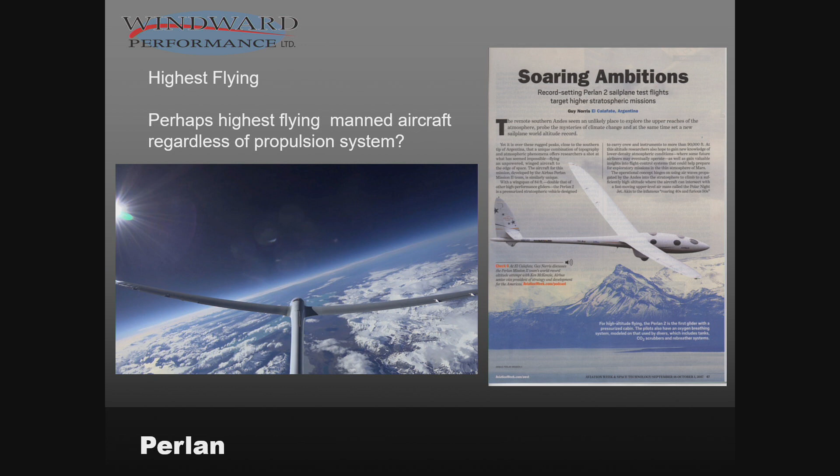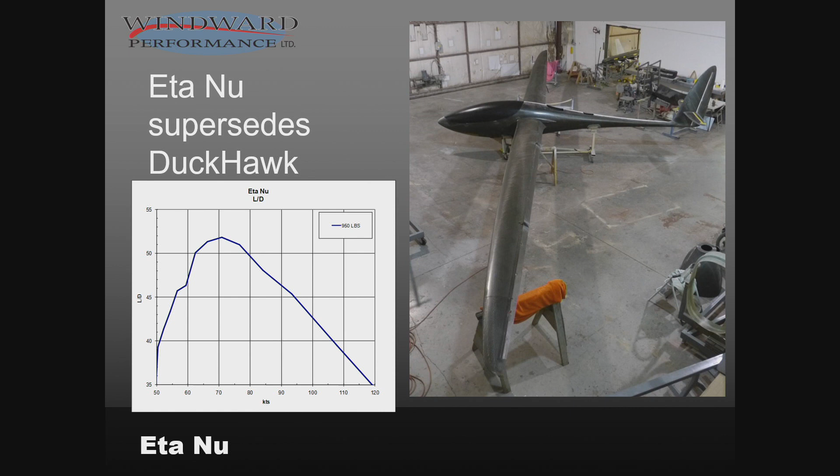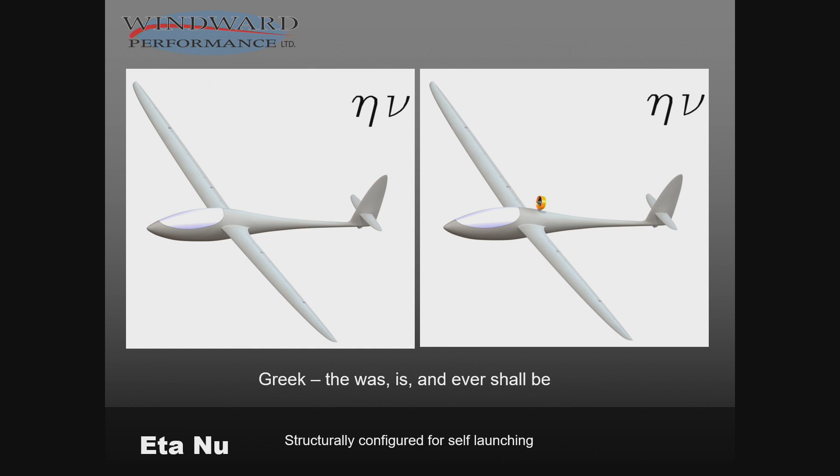That aircraft has been superseded by this one, which I call the Eta Nu. It's a bit of a different airplane in the sense that the incorporation of self-launching is a difficult thing, and it has to be built into the plane from the beginning. So here it's shown with a ducted fan, potentially an electric ducted fan. That's not something you can buy, unfortunately, and it's only about half done. But that's how it is. The name is from the Greek, right? The was, is, and ever shall be. So I think that's interesting.

But what would we do if we have the highest flying plane, the sweetest plane, and the fastest, most maneuverable plane? This previous sailplane is capable of 225 knots at 24,000 feet. So it's really, really fast compared to other sailplanes, gruesomely fast. And it can do that, and has done those things that I talked about.

That's exciting, but what would you do after that? Where would you go? What would be even more satisfying? What would be more rewarding? What would be more fun? And so this is this next plane, I believe, and I think that's wonderful. One of the things I've said about it is, how can I fly without leaving a wake? Just with beautiful elegance, with flexibility, with rewarding characteristics, with all these things. So there are some pieces to that.

And one of the special ones is, two seats side by side. And then the bottom one is, of course, we have to have that performance. Performance expands your experience. Performance is fun. So it comes with a cost, I do understand, it comes with some things. But we have to balance that out, that's what designers do.

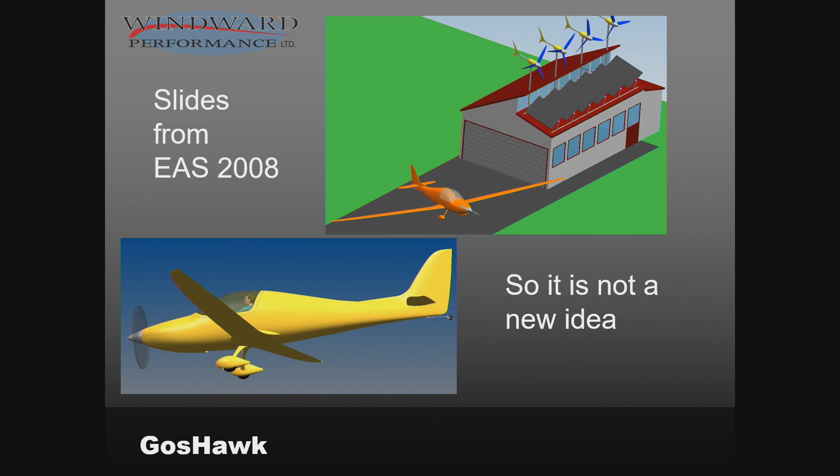So these are some slides. This was the plane that I was thinking about, and I had even a loft at that point. An electric airplane, I thought, really had some neat tangibles and intangibles, right? So I've been thinking about this for a long time. I've been building this plane for a long time. I wish it was done, but I promise you I wish it was done more than all of you, but hopefully some of you wish it's done too. But it isn't, but it's coming quite far along.

And when you make a special plane, what happens is you end up with a lot of very bespoke things. So it might look conventional, but it's all very special. That's the real plane, a molded, pre-preg carbon fiber plane. The mold's been made. The propeller's special - we won't talk specifically about it, but it's very integral to the whole plane and its performance. That's a special propeller, custom made, custom designed for this.

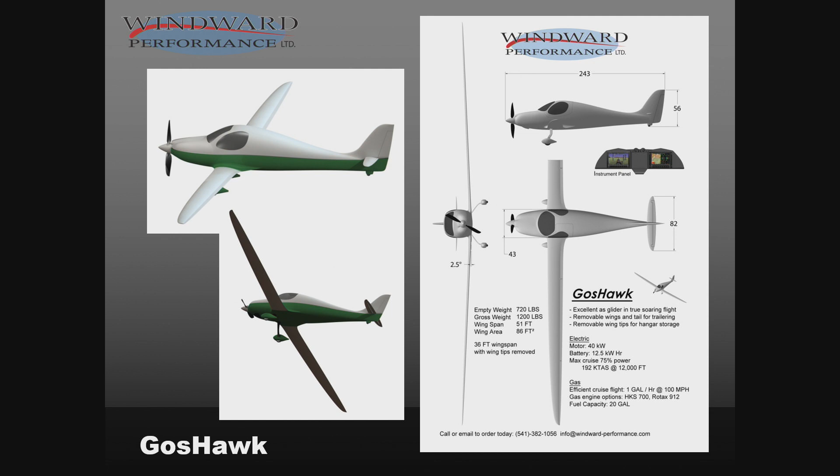And in general it looks like you see here. Long wings, I guess, for some people. For some, maybe not so long. But a plane that weighs about 1,200 pounds gross.

We're going to talk a lot about 900 pounds in this discussion, just because that's kind of a weight for a single person. And as an electric airplane, it suffers from some great deficiencies, right? It can't carry much energy along with it. So we have to be very efficient in everything that we do with it, meaning very clean, right? We can't have a lot of drag. The propulsion system has to be terribly efficient also, so this tractor configuration is a very good way to do that. It's integrated into the airplane.

Otherwise, the conventional airplane, I believe - you looked at the previous planes that go the highest and have the highest lift-to-drag ratio. I didn't say it, but an Eta Nu has about a 52-to-1 glide ratio, and that holds up very well throughout the speed range.

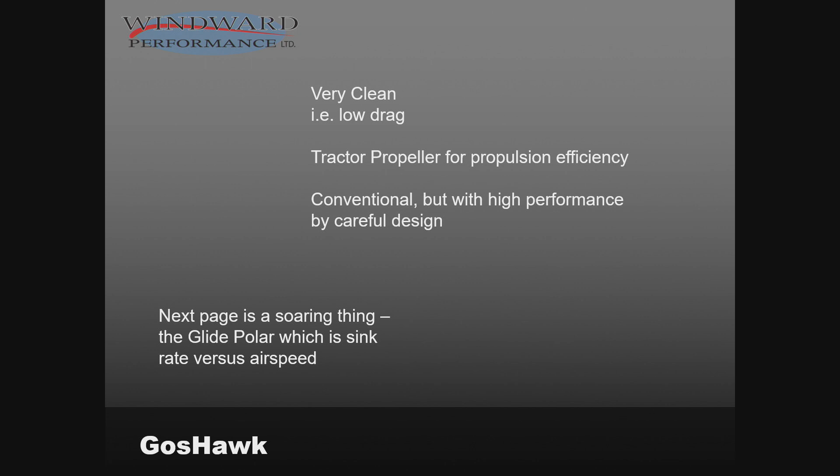So that number oftentimes talks about a peak number, which I consider almost irrelevant, but what does that performance look like? I know there's some soaring people here, and this is called a glide polar. It's really just a measure of sink rate, for straight line flight. Oftentimes we're circling, and in the analysis later we'll include circling - I may not specifically point that out later, that this is not necessarily directly representative of that. But it is the one that you see when you talk about gliders, and when they talk about glider performance, they'll talk about this polar.

But we can change this into a little bit different format, where we just sort of convert it into lift-to-drag ratio. So this is for the same vehicle. Those are representative - we have speed, and then we have this lift-to-drag ratio, which at high values of lift-to-drag ratio equates to sort of this glide angle, if we go back to some kind of soaring thing.

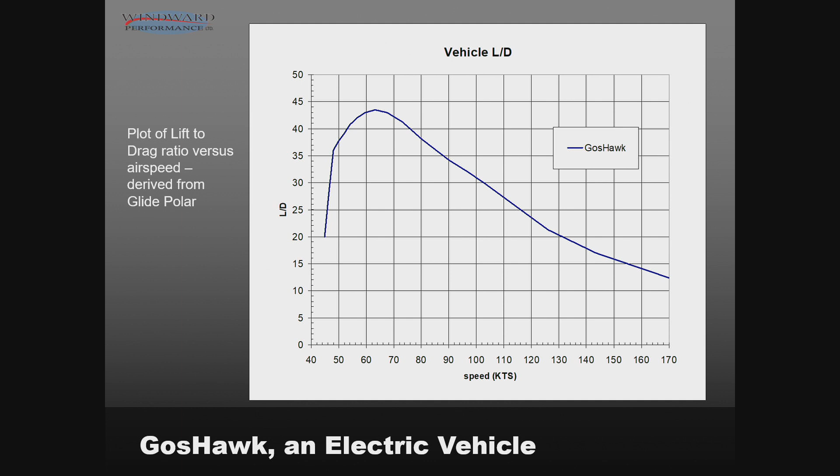So it's an electric airplane, and I would like to compare it with some other things, electric vehicles, and we'll just use some ground vehicles, right? And we want to characterize a couple of vehicles. I picked a couple of Teslas here, and we go back to this lift-to-drag ratio, and we can think about the lift-to-drag ratio for a wheeled vehicle, all right? And so I've eliminated the lift-to-drag ratio at zero velocity. It's an uninteresting point, actually, and there's some peculiarities that happen there.

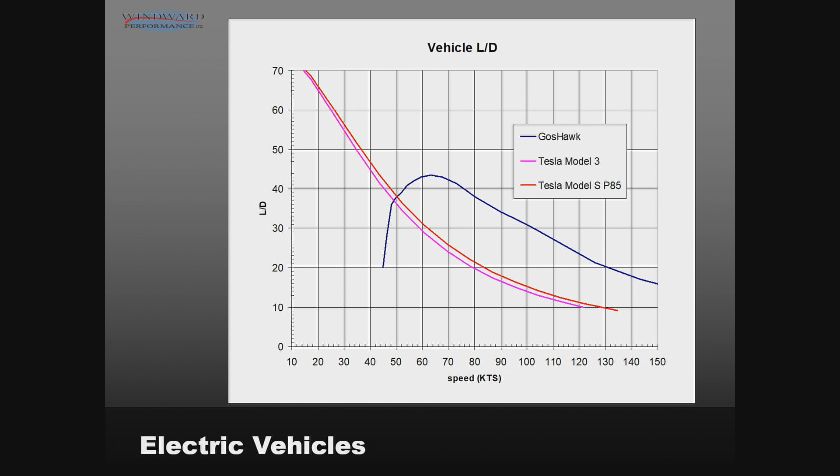I did show this slide to someone, and they asked, where did you get this? And I said, well, there's enough information about some of these cars. They've put them on dynos, they've done some other things, and so I can infer a lot of things, and I can peg down a couple of points. So I've put all the pieces in there, and it matches up quite well with the predicted performance of the car, like their top speed and some of these other elements, right?

That previous set of data, the lift-to-drag ratio, can then be converted into this other one, nautical miles per kilowatt hour, right? And forgive the units, but I just decided that we would use nautical miles, knots, nautical miles per hour, and then of course we have kilowatt hours. That's distance divided by energy. So just think about the units that way and you won't get too confused.

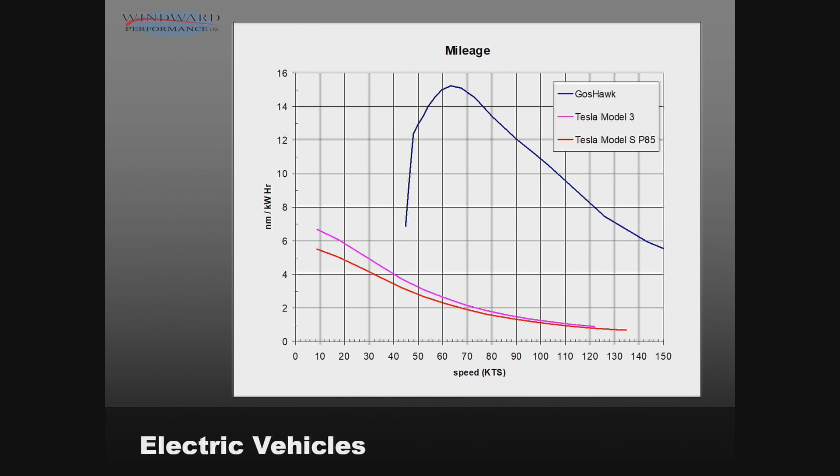But you can see that the Goshawk is very much more efficient. Now, they're completely different vehicles. The information for the Teslas is for single occupant, and the information for the Goshawk is for single occupant. So, you could put more occupants in it, and they're a little bit different. But just for fun, we'll put something really extreme in there and see how that compares with the Goshawk. Because the Goshawk obviously was much better at covering distance for a certain amount of energy than those two wheeled cars, right? Very nice cars, though.

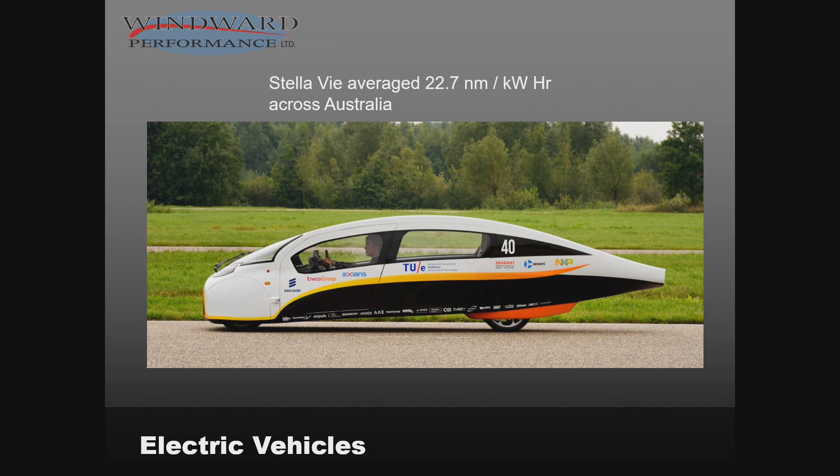This is a specialized vehicle. The previous presentation had the Sun Racer, right? The Sun Racer competed in that race across Australia, and now they have a different class called the Cruiser class, where they reward some points for extra amenities like extra seats. This is a 5-seat vehicle. It did race across Australia, and it averaged 22 nautical miles per kilowatt hour. It also did that with an average of 3.4 occupants. And so I have a curve for the vehicle with a single occupant that I've derived, and then we can see the big green dot over there.

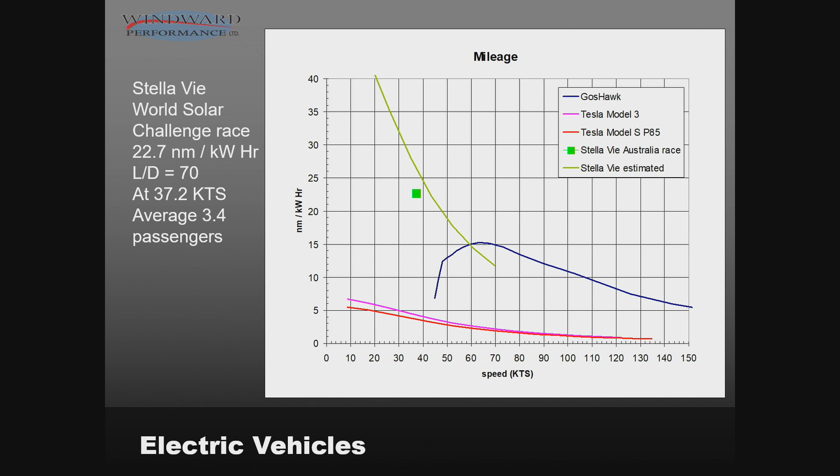So while that's very much better, it only does it at perhaps an uninteresting speed, right? It's not better than a Goshawk above 60 knots. So the plane is very efficient at these higher speeds. And this average speed of 37, maybe that's not even terribly interesting for you. Might be too slow. Let me just check, I'm reading the slide here. The lift-to-drag ratio at that low speed is quite high, but that's important if that's the speed you're going, right? If the competition eventually goes much faster, maybe they'll have to get those wheels off the ground.

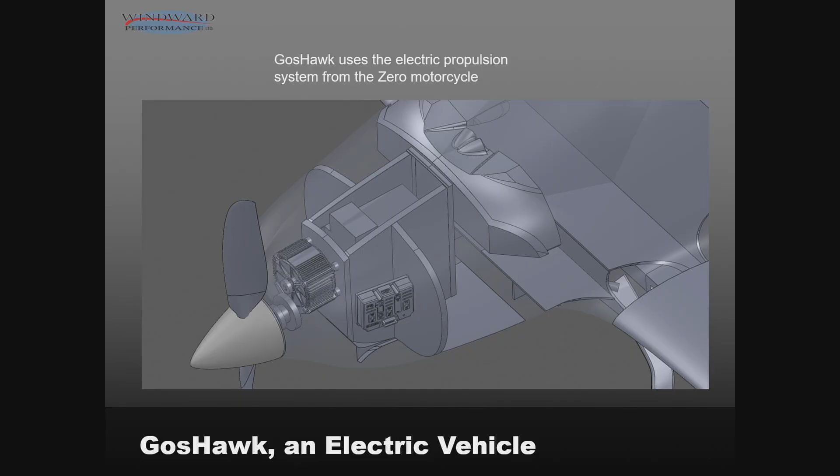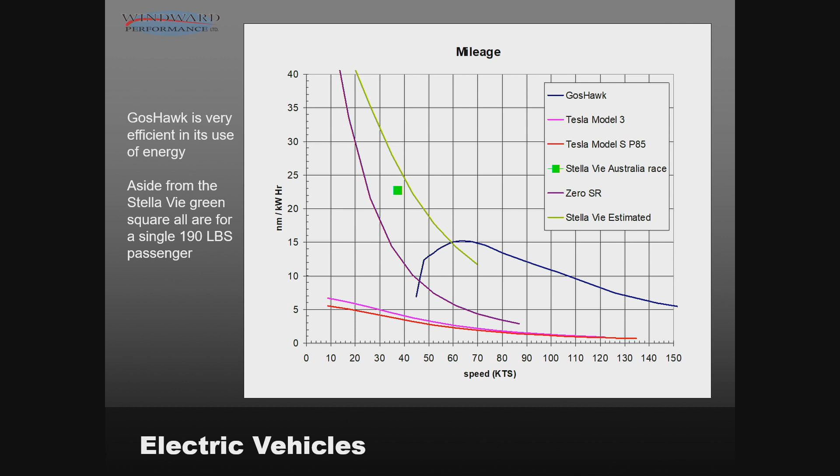The Goshawk utilizes all the components from the Zero motorcycle. So the battery is here, the motor's here, the controller's here. So I threw in this extra slide here. What if we put a Zero motorcycle, which is an electric motorcycle? That's that purple line. Okay? So not as good as the Stella Vie, very good, much better than the car. And I think one of the other slides earlier in the day had a motorcycle in there too, and I can't quite remember whose it was, but it was in there. All right.

Now, the reason I presented that is to say, here's a Goshawk. It's a very efficient vehicle. Maybe we can all even agree on that. And so it's an electric vehicle. It's as efficient as we can do, right? The whole design is built on this efficiency. If I was going to now show you some kind of performance curves for something else, like a business jet in this case, this is some plane.

You can see this graph. We're talking about taking off. We're talking about climbing over the airport. Then we start a climb in the direction of our destination, and we cruise, and we descend. So we have 1,152 nautical miles, burns 191 gallons. It cruises at 422 knots, and it takes 8.4 minutes and 14 gallons to climb to 28,000 feet.

Sorry, that one's misplaced, but that little arrow is supposed to point to that corner up there. The little gap in there I didn't graph, but that's the acceleration from the climb speed to the cruise speed and some other things. So a lot of stuff's built into this, and it's the same analysis that then I'm going to show for the Goshawk.

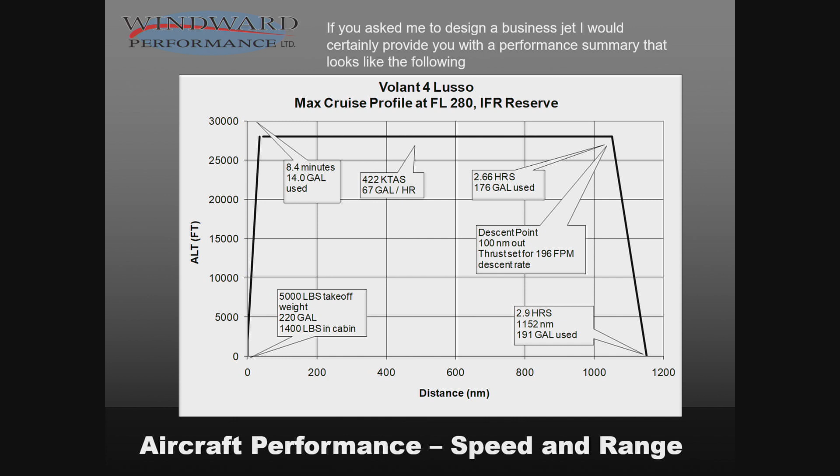Whoops. Sorry about that. I went to push the laser and got the next slide.

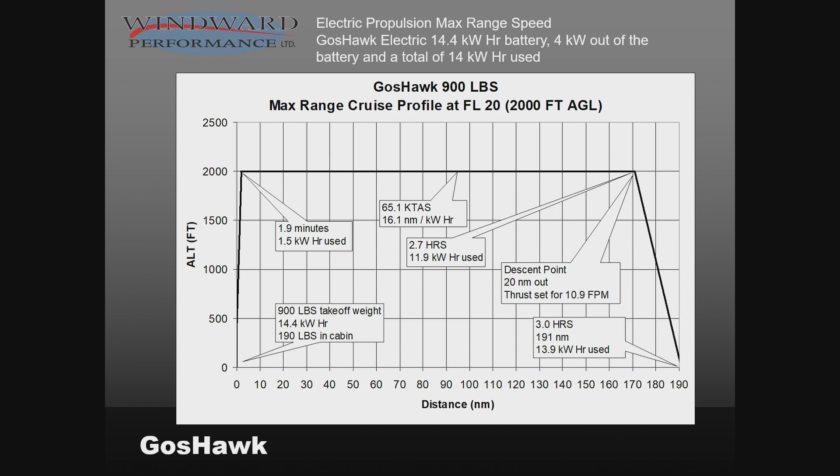So this is kind of a range profile for things. And maybe you're not excited about it, right? But it's still very good, I think, right? One of the really nice things about having a little battery is it doesn't turn out to be terribly expensive. All right, so the plane, though, is really efficient. And as a result, it also can turn out to be quite fast. This plane will go 172 knots. It's structurally capable of that.

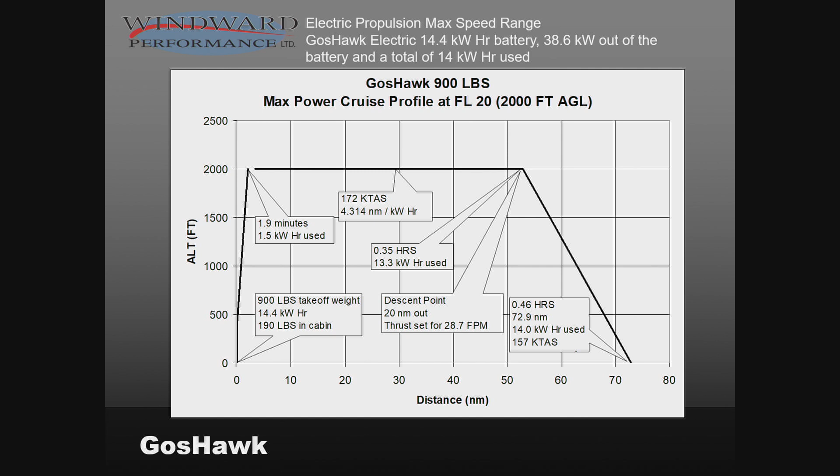You see the same climb. You see the very high-speed cruise. That consumes the battery very rapidly. The range goes down to just under 73 nautical miles using the same 14 kilowatt hours out of the 14.4 kilowatt hour pack. All right. Average speed, though, across that is 157 knots. That's kind of fun.

Soaring. So, soaring is something that's very exciting. Soaring is something that's rewarding. I enjoy it very much. And we're going to talk about incorporating that now into elements of this electric flight. Right. Ultimately, regenerative soaring will show up, and so we're going to take energy from the atmosphere. We're going to fly in the updrafts, and we're going to avoid the downdrafts. We're going to do those kinds of things.

And then just to point out one thing, conventional soaring only stores energy in the vehicle with potential energy, with altitude. All right. Hopefully, people have a little bit of understanding. We're going to talk about thermals and thermaling. That means you circle in the rising air, thereby bringing your vehicle to a new altitude that's higher, adding potential energy to the system. You then glide over to another column of rising air, and you repeat that process.

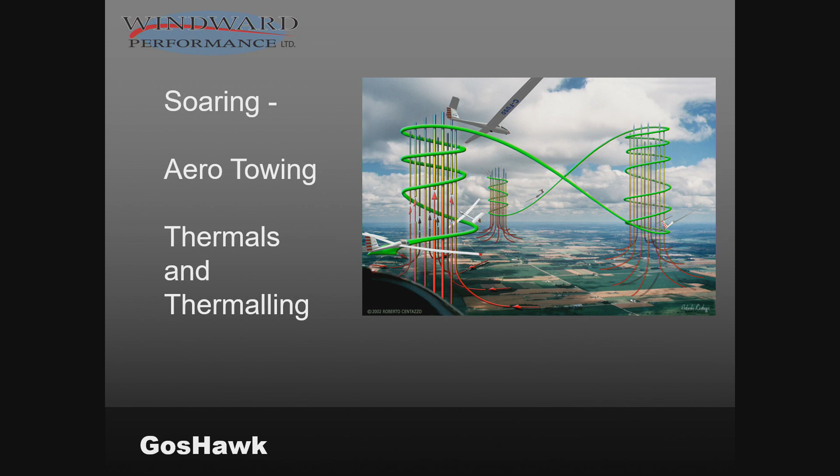And gliders can fly for many, many hundreds of miles, right? 1,000 kilometers is one of the big achievements that you do in soaring, and the planes there have done that. Well, not the high altitude one. But even the little SparrowHawk has gone 1,200 kilometers on a soaring flight. So 1,200 kilometers, right, which is quite a long distance.

How do you get these unpowered vehicles going? If you're not familiar with another soaring term, aero towing is what you do. You hook it up, and I hope everyone kind of says, this seems silly, but it's what happens. I put that one picture in there. Siemens put an electric motor in a plane, and they did tow a glider. They called it the first time that's ever happened. If they were here, I'd ask them how many kilowatt hours they used to do that tow. Do you know?

16. Wow. Well, that's because that plane in the front is really crappy. But here's a regular plane, all right? And we can convert the energy capacity in gasoline. There's conversions, there's efficiencies, there's other things that might happen.

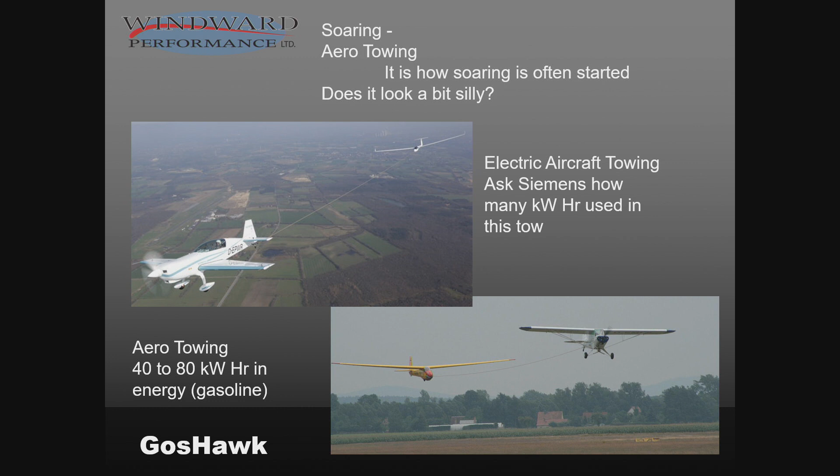But I estimate that about 40 to 80 kilowatt hours in gasoline is used to do a tow in a conventional tow plane. One kind of plane is not used across the board, but Cub-type planes are used. Pawnees are terribly draggy things. They're kind of a Cub with the wing on the bottom, but you can use Cessnas and other things to do this towing operation. So when we get back to soaring, we say it's completely free. It's not completely free because we make an investment in the beginning.

Okay, that's this tow. Another little graph, because we're going to talk more and more about soaring, and I think it's quite nice. One of the things we're going to talk about is that when you drive your Tesla, you can decelerate, you can recoup some of that energy. You pay a heavy tax on that because you don't get it all back. And none of the parts of this regenerative soaring that we're going to get into are terribly efficient either.

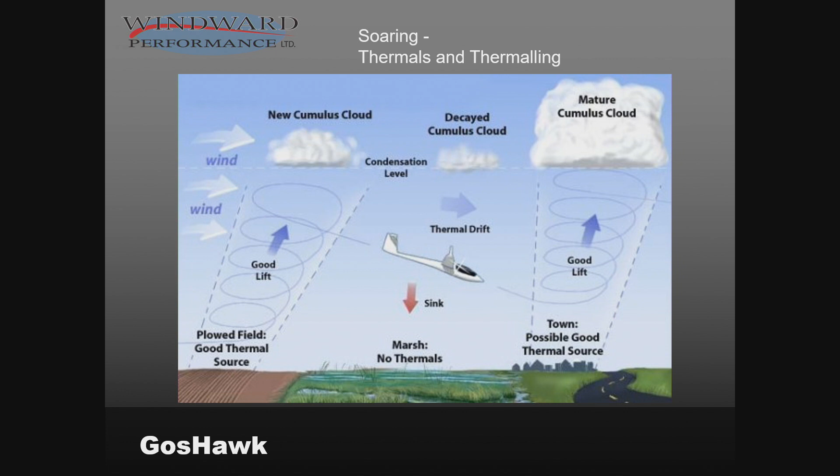But what we have is the ability to sort of go downhill for as long as we want. And that's when we stay under these clouds. Oftentimes the thermals are marked by these cumulus clouds, and this figure shows those. Hopefully you'll see in these next figures what that might look like. From the ground it looks like this. These are called cloud streets. This is a satellite picture. You can see all the white dots. Those are clouds all over the place.

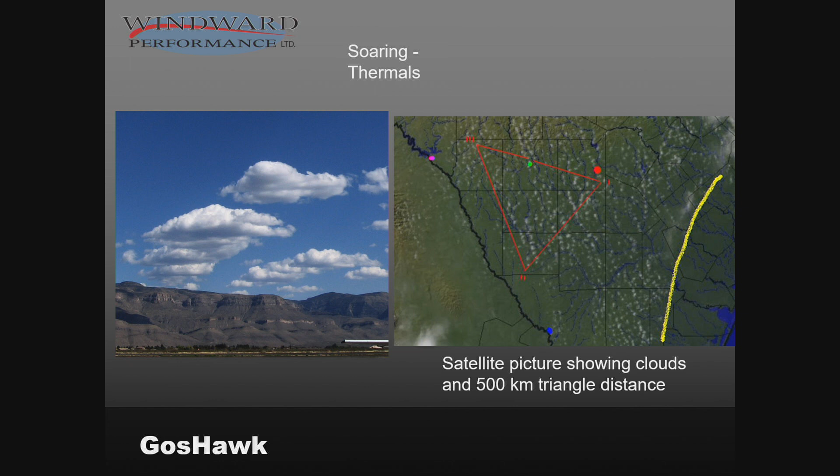This is a 270 nautical mile, or in the soaring world, a classic 500-kilometer triangle, right? What's the reason for this? To say that it is possible to have clouds all over the place and to cover distances. Maybe not every day. If it's a bad day, you get stuck doing those other range profiles. But if it's a good day, you have some new exciting options. Look at this. You could go a very long distance here in a sailplane.

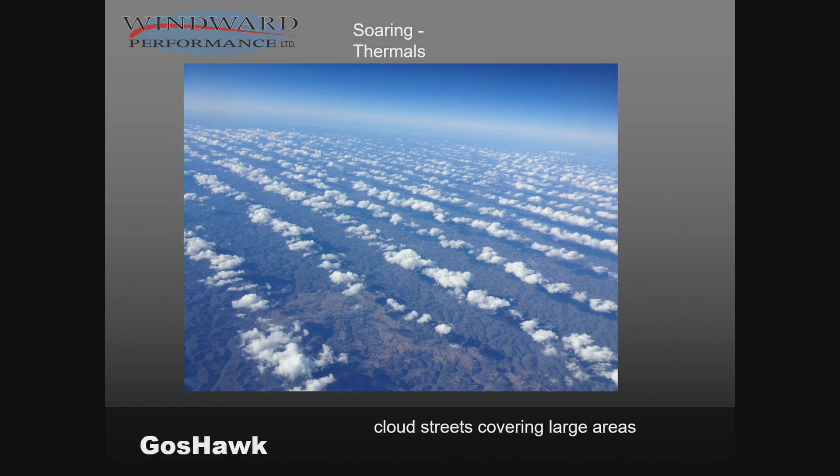But in a GosHawk, you can also have a really interesting opportunity to recharge your battery. So rather than just storing energy in altitude, we get to put it in a box. And that's kind of exciting.

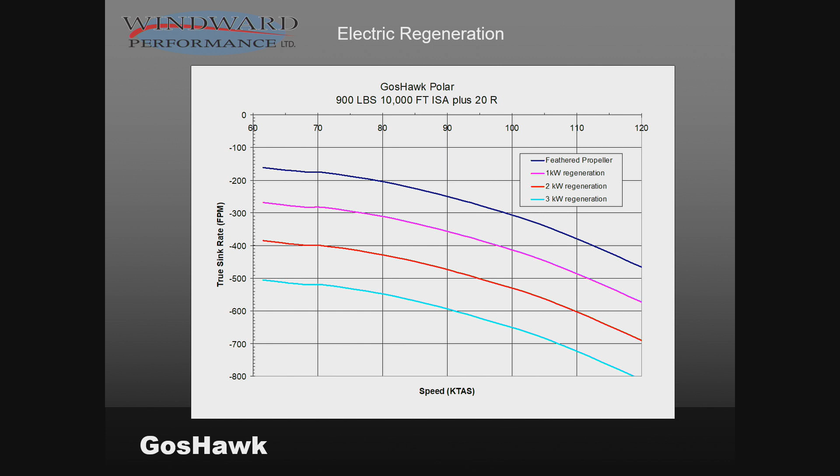Another glide polar, just like the previous one, but I've included some regeneration points. It looks like those lines are all parallel, and it turns out they're not. The propeller efficiency is pretty good, not perfect, but its changes across this speed range are relatively small. So while those lines look parallel, they're not exactly. But we can see the extra sink rate you would incur from a 1 kilowatt, 2 kilowatt, or 3 kilowatt regeneration; it's increasing your sink rate.

I asked Peter, he's going to keep me honest whether any of these cases are possible. Do you think you could fly this plane in 3 knots of lift? That's not what you achieve, that's the lift in the thermal. Peter nodded. How about 4 knots of lift? Can you do that ever? Do you see those conditions? 5 knots of lift? If you can do 5 knots of lift, you can recharge in 34 minutes all the energy that you used to launch that plane.

So now I'm going to make a bold conclusion that flight without recharging is easy, which is really exciting: to fly an electric airplane and never recharge. On most days you could come back with your battery full. So that's not just doing something down here at the bottom. This might be approaching doing more with very little to nothing. Not just much less, but almost nothing. And that's what I like to think about.

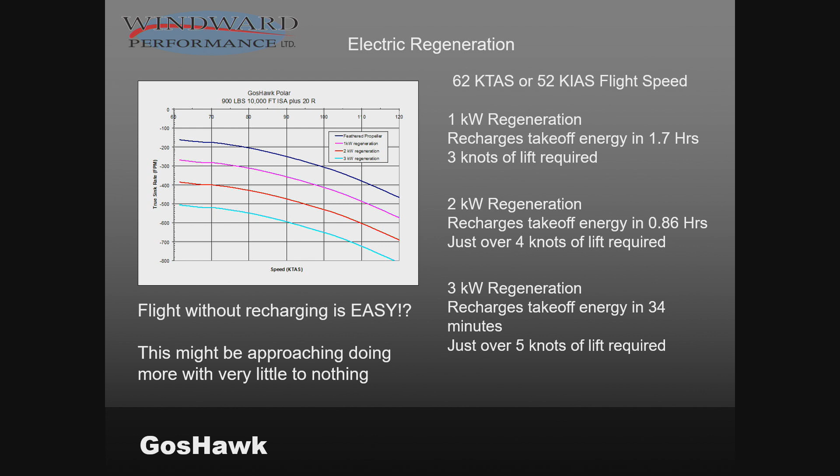So now we have this propulsion system. We're using it to take off, to climb, to get started in our soaring. Is there another way we can use it to have even more flexibility, maybe even more performance? We can use this propeller in the front to regenerate, so visualize it like one of those wind turbines spinning in the wind, and we can put the energy we used to take off back in the box and take it home.

We can use it again when we want it. But we can also use this propulsion system to change the performance of the airplane, which gliders don't really have to do. Sometimes on the ground, they'll change their weight, and that'll affect the glide polar.

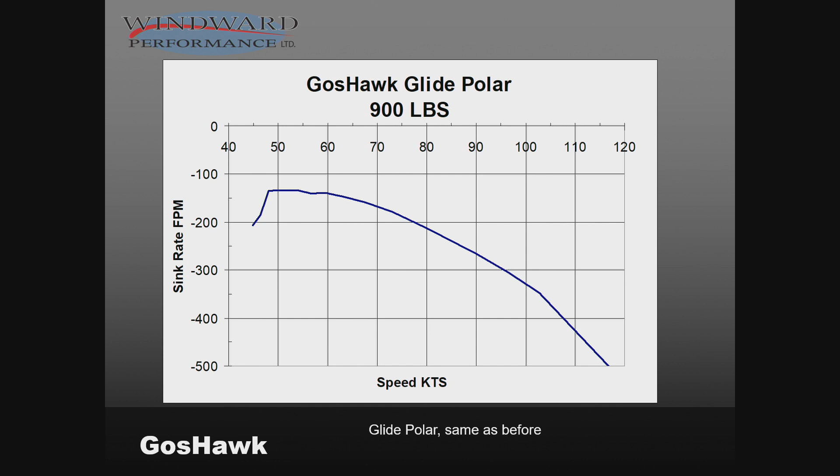We're going to take one step back and look at this glide polar again. This is a conventional motor glider. Someone might say a GosHawk is just like this plane, but in fact it's very much better, even if we just feather the propeller.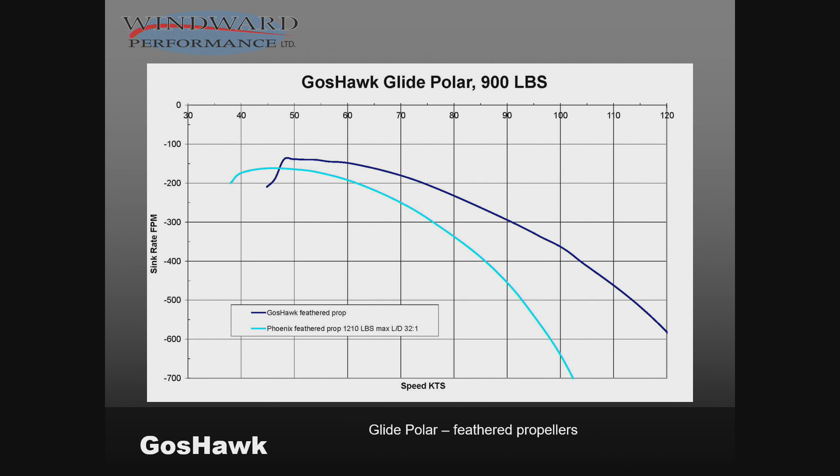The previous picture designates a certain plane, characterized by this sink rate versus airspeed curve. The Goshawk is much better.

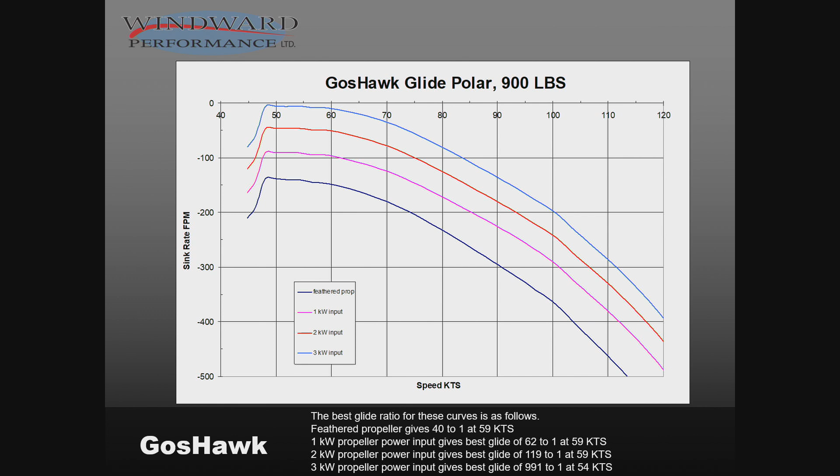We can take our propulsion system now and add a little bit. Rather than those range profiles we were talking about previously, where we're flying in level flight, meaning we're adding enough power that we don't have any sink rate, we can add 1 kilowatt to the plane and improve its performance. We can add 2 kilowatts, we can add 3 kilowatts. It still won't quite fly in level flight, but its sink rate versus speed gets a lot better.

This will be important as we start to compare it to much more high-performance airplanes. This is a single-seat, 15-meter standard class sailplane. It has a sink rate versus airspeed curve that looks like this. The Goshawk's still better than it, maybe not quite down here at the low-speed, some of the climbing cases.

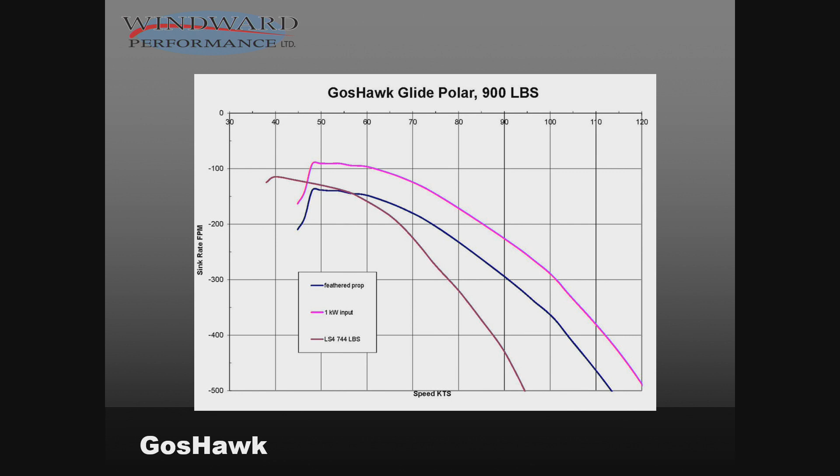But if we put 1 kilowatt in, it's dramatically better than that airplane. So we could fly putting 1 kilowatt out the shaft for hours and hours and hours, 11 hours after our climb to altitude and getting started in our soaring.

One of the things the planes use, and I did allude to it briefly about changing the weight, is you can add weight to these planes. It moves that glide polar, shifts it, the sink rate increases, but the speed at which those sink rates occur moves out to a higher speed.

So we look here, 1 kilowatt in, but at the higher speeds. We can put 2 kilowatts in and match it all the way out to quite a high running speed of 115 knots.

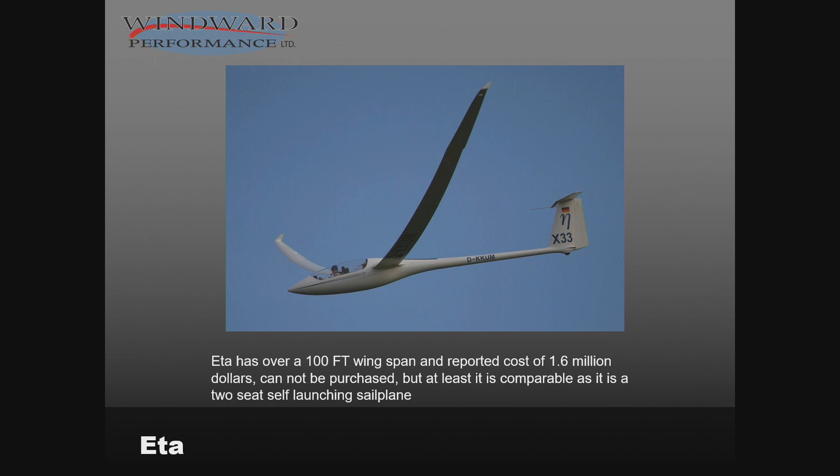This plane has a 100-foot wingspan, 101-foot wingspan. Maybe you've heard about it, it's called the Eta, and it's very expensive. In some ways, it's starting to be comparable. We went from single-seaters to now a two-seater, but they sit in line with each other. It is a self-launching plane. It's not an electric airplane.

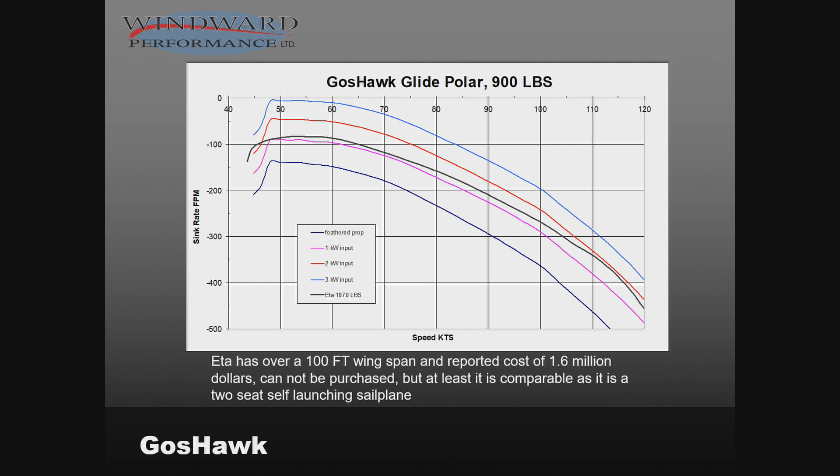Very high glide ratio, in the high 60s perhaps, maybe 70 or something. In contests, this plane didn't turn out to be very much better than some of the smaller wingspan two-seat or open-class airplanes even. But still, we see that 1 kilowatt in the shaft brings it up, 2 kilowatts makes it better than the Eta.

This is an electric self-launching sailplane, the Antares. In some sense, that's very comparable. I would say that it isn't necessarily my style to compare against other manufacturers' vehicles. I have a picture of a plane sitting on the ground, and I have pictures of their planes flying. But still, let's see how we might compare against this airplane, which is a very high-performance single-seater and an electric self-launching sailplane. So in some ways, they're getting to be quite similar.

If we add a little power again, we can compete very favorably with a plane like that Antares. And one thing about the configuration, and I'll go back if I can, please.

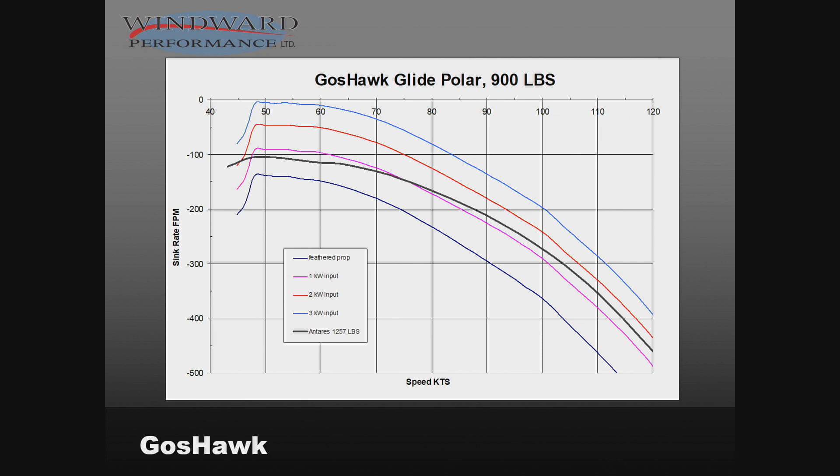You don't see any evidence of that propulsion system. That, though, really precludes its use as an effective regeneration tool, where we can windmill that propeller and put energy back in the battery. So it doesn't have that complete flexibility, because it's mounted on the pylon, it's quite draggy, so it's not really effective to use as a performance aid. In fact, it's so draggy it's akin to having the air brakes open when that's deployed, so they really waste a lot of their precious battery energy.

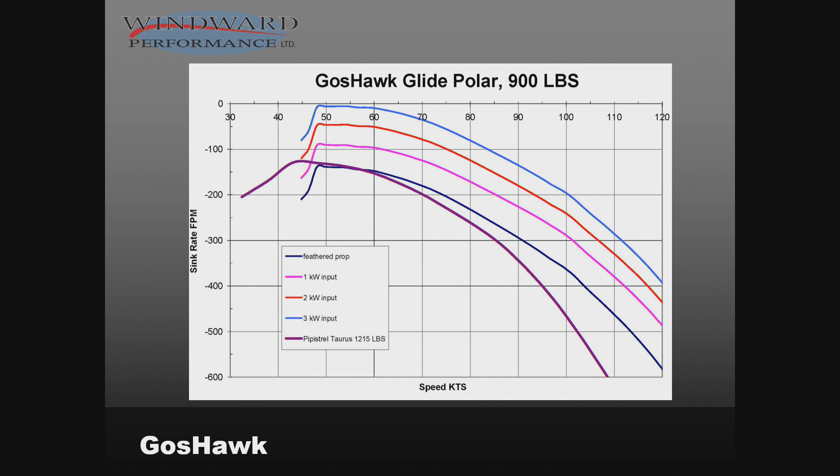We have a representative here, or a couple from Pipistrel. Here's a plane that's getting closer again. It's side by side. They have an electric self-launching option. Its performance maybe is arguable, plus or minus, but we think that the Goshawk might be a very good soaring plane. And if you start adding extra thrust from the propulsion system, it really gets quite good.

Now, if we really dig into this and start accounting for the regeneration, the actual efficiencies of those things, cross-country flight, thermals, thermal profiles, thermal strengths, we'll distill that down into just three cases: good, medium, and poor.

And what happens when the conditions are really poor in a sailplane is that you will not make it to the next source of lift. You will land out.

But in strong conditions, now here we're looking at the Eta now. We saw a picture of that earlier. I would say, I'm going to make a bold claim, this is probably the highest performance sailplane, regardless of wingspan, ever made. You can see that in good conditions.

I'm not presenting all the details of those thermals and their diameters and their strengths and everything else. But here we're playing this trick again with weight. And I'm going to include this, but very high average speeds. This is an average speed. It can do over 100 knots for hundreds of miles, which might be faster than your 152 can do, even with its motor running.

The SparrowHawk, we saw a picture of that. That plane's very good in some conditions. In very strong conditions, it suffers against this very high-performance airplane. I put this one in just as a comparison, so you might say that's not a lot, but in the competition world, this wins every time. 103 knots beats 98 knots every day, and the points will just add up, and you end up with a crushing victory. The Goshawk now.

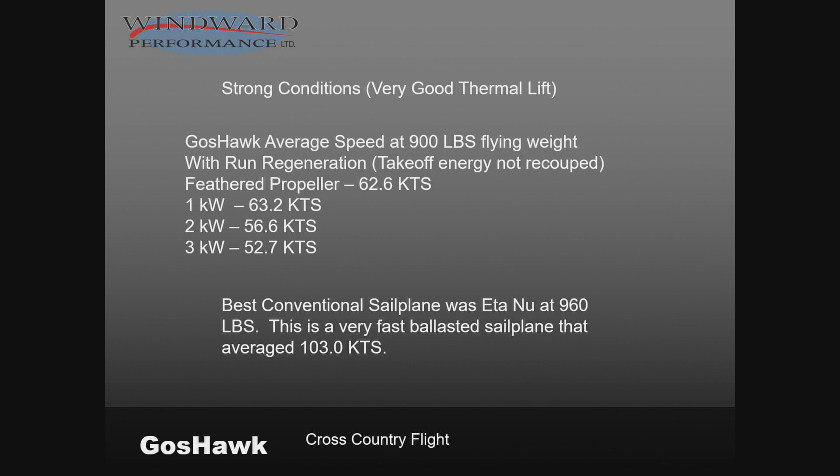Remember, the fastest conventional sailplane was only 103 knots. We'll add another case here. This is where we're going to regenerate the takeoff energy, and of course that regeneration slows your average speed down greatly, but still not too bad. This is what's kind of exciting: it's still faster than flying with a feathered propeller. So you're paying a lot of tax, you're getting these other intangible benefits, like I'm in trouble, I'll use my motor. But we're recuperating our takeoff energy here, and it's still better than not using regeneration, so that's really neat.

If we regenerate the full load, everything we use, every time we use it for propulsion, we're going to get that energy back. Every time on takeoff, we're going to get that back. So this is landing again with a full tank. And it really does dig into your speeds, but it's entirely possible, right? You can do a 500K flight and land with your tank full. And I think that's unbelievably exciting, unbelievably satisfying, rewarding, all those things I was looking for in the beginning.

I think this is how you can do that. Medium conditions now, we'll go through this a little quicker. The speeds have come down, you see, all right?

The regeneration takes a little longer, you take a bigger hit. Without regenerating, you can still go very fast. Now the Goshawk goes very much faster than the other planes. We can, if we wanted to, put the 3 kilowatts in, we can do 70 knots, which is better than the fastest of the conventional airplanes, and not just by a little, but by a lot. Remember that this plane is just designed to excel in those good conditions, to go as fast as any sailplane could. But now, if you don't want to recharge, you can be the fastest plane flying that day, at least amongst the soaring pilots.

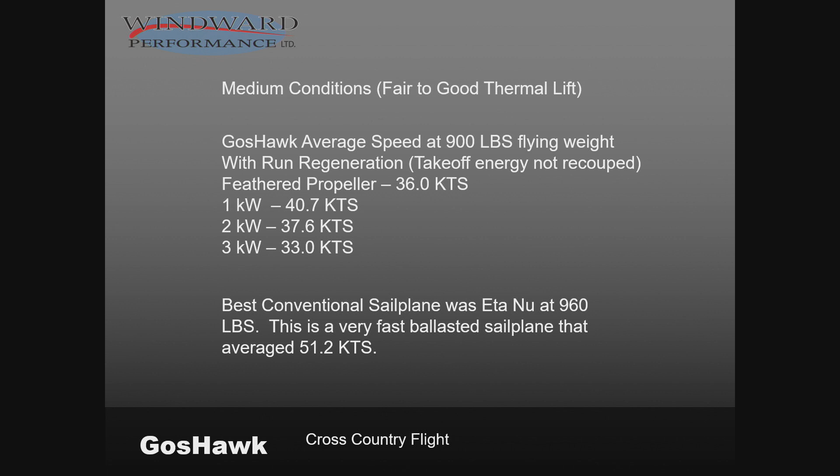The Goshawk, again, if you want to charge up, it's digging into that, and we can still do that. We can land with a full battery. I hope this now can draw one of the things that's flexible about this plane, where it's really adding, right? Anytime, anywhere, how can I have a good time?

Of course, if you're landing out, you can't recharge. But even if you do, right, you can still make it around. This is an unreasonably slow speed, though - you can't do 500K at 6 knots, it just takes more than a day. But you saw on the previous slide, you can make it around at a very nice speed.

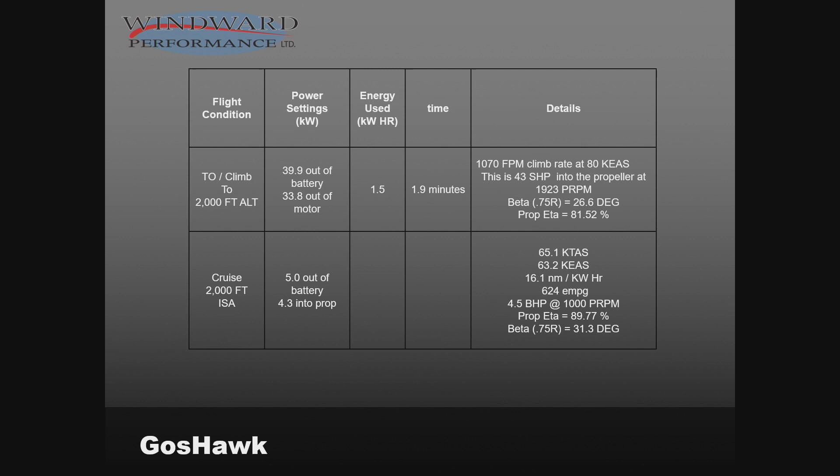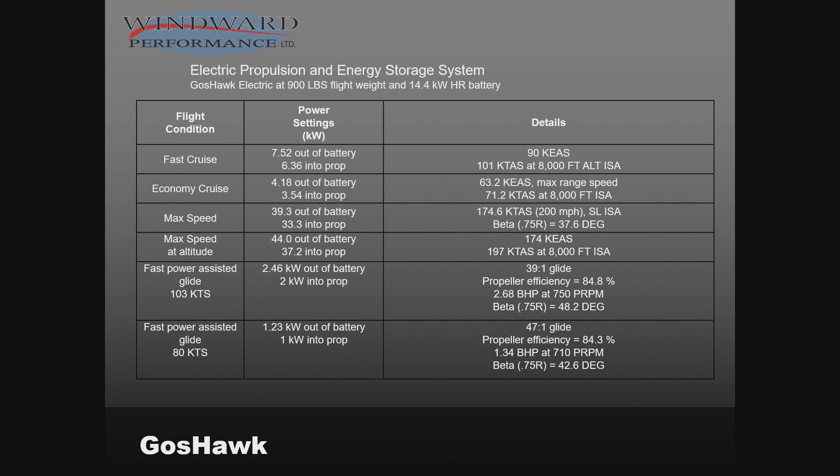One of the big tough design points for this plane was to have a propeller that would work in this exceedingly low power environment, and also work in that climb case. You just don't have any energy to waste. So some of these fast glides, it's interesting — you're really going to have to have a constant speed propeller, turned down to 700 prop RPM. The propeller efficiencies can still be quite high. They don't really like to have so little power put into them, so the blade angles get quite high. If there are airplane designers here, they might find that interesting.

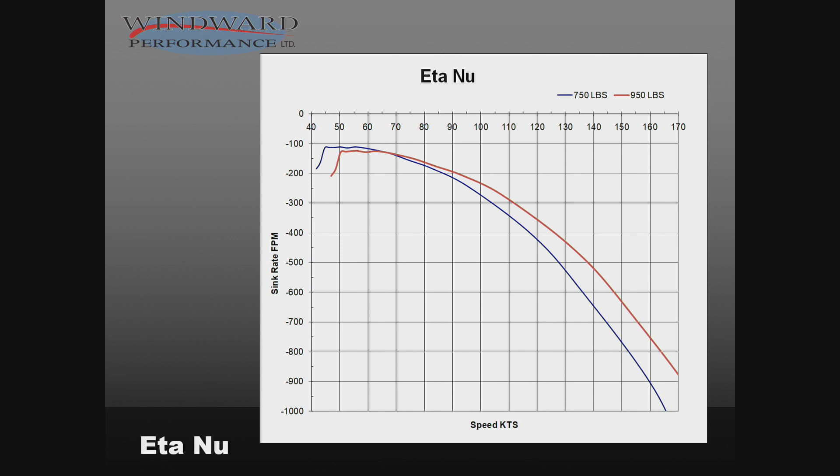I'll pop back — in the previous slides I didn't really compare to the Eta Nu. This is the Eta Nu, and this is the glide polar at two of the weights. This is a bit of a review, and I know maybe the soaring thing's not interesting, but this is what happens when you add weight to the plane. At 750 pounds it's lighter, it goes slower, and the sink rate's lower. At 950 pounds the sink rate's higher, but those speeds are pushed out. So when you're in strong conditions, this is why those heavier planes tend to work better — you spend less time climbing, more time gliding, so overall you go faster when you're heavier. A bit of an explanation for that.

Overlaid then the Goshawk and the Goshawk with power assist, on what I believe to be the very, very high performance Eta Nu. And then that's that one there.

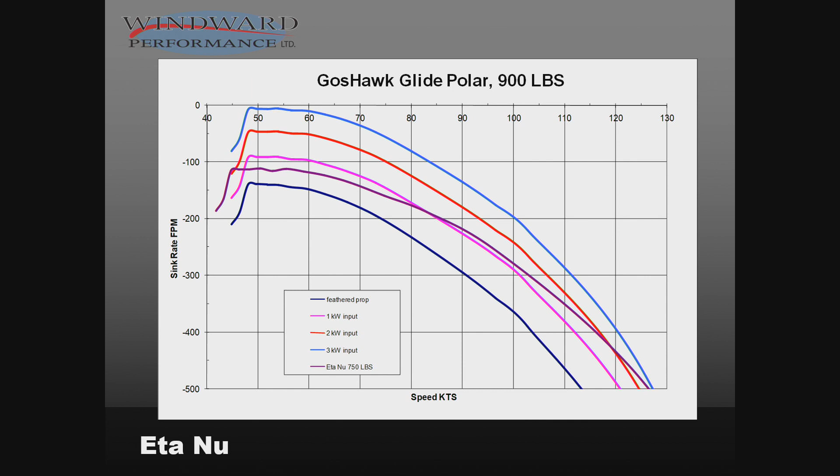A Goshawk does have a chance in certain situations, and if you don't really want to land with your battery full, you can race around with that plane. So for me, this electric plane, this regeneration, these other things — to me it's a means to an end to accomplish what I then believe is one of those other corners of what can absolutely be the most exciting, the most rewarding, one of the ways to have the most flexibility, to fly in different conditions.

I just think landing with the battery full is just going to be the most fun thing you could possibly do. How long does it take to charge up? I don't know, I never charged up. I flew all last summer and I never charged up.

Hopefully — I took the discretion, of course, to talk about soaring, to incorporate soaring terminology and other things. But if you didn't know anything about that, I hope you learned something. If you did, I hope you found it really interesting. Are there any questions?

I really found this amazing, that such a small amount of kilowatts made such a big difference. And of course it immediately makes me think of these flexible solar panels from Alta Devices — that if you have enough area on the wing and tail of the Goshawk, you would get a continuous 2 kilowatts for free on a sunny day. Have you done any looking at what a solar energy system would do for that airplane?